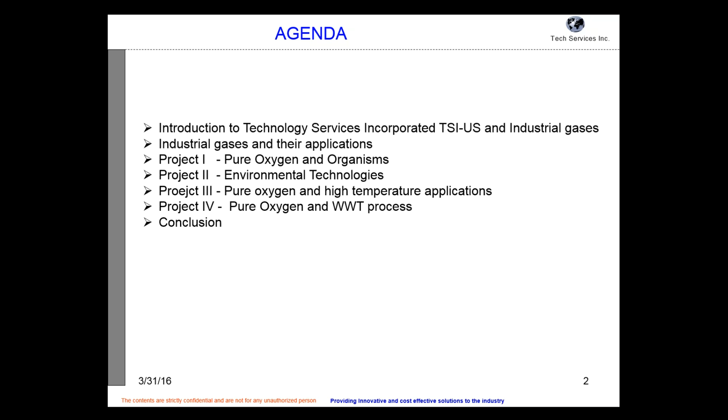My focus today is to look at industrial gases. Industrial gases means oxygen, nitrogen, hydrogen, helium, argon, krypton, CO2, and how they're used in industry. Over many years, I've spent time applying these gases as chemicals to a variety of industries, and I'm going to touch on some of the applications, with my focus more on the environmental area. What I found is these gases impact tremendously on productivity, yield, and economics. I'll quickly go through some of them, and if you have questions, let me know later on. We will talk, and if you have a specific interest in a specific area, we can talk on a one-to-one basis.

I want to cover basically the company I'm running, and also what industrial gases are and how they're manufactured, just to touch on that quickly. I want to focus on oxygen use in the pharma and biotech area, then the environmental industry. Remember, the whole focus is how we can improve the environment. I'll also look at high temperature applications and wastewater treatment.

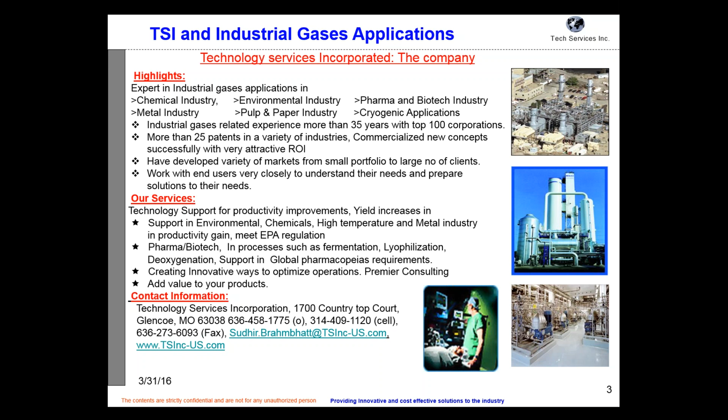I'm going to go through each of them quickly. The company, what I founded and what we have, is the main focus here. Did I do something wrong? Okay.

The company I have has focused on a variety of industries: chemical, metal, environmental, pulp and paper industry, pharma, and cryogenic applications. The main focus has been on how do we make it economically attractive and environmentally safe. Our services include supporting all these industries, helping improve productivity or yield increase. We're basically located in the St. Louis, Missouri area, and that's on the website.

Quickly looking at industrial gases, how they're manufactured in the industry. How do I use the pointer here? The bottom one for pointer? Okay, if you look at the Joule-Thomson principle, which states that if you compress air and expand it, it cools down.

The same principle is used in manufacturing industrial gases. You compress air to the extent that your final temperature is close to minus 400 degrees Fahrenheit. Then the air becomes liquid. Liquid air goes through a distillation column, and based on the boiling point of these gases, you separate out nitrogen, oxygen, argon. This is how industry manufactures industrial gases. Many times, from an economics point of view, they build these air separation units right close to the point of use, where there's a large amount of these gases being used, like nitrogen and oxygen.

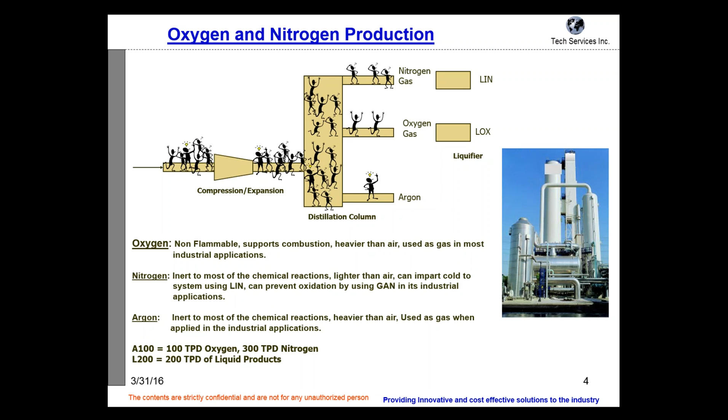Oxygen is a non-flammable gas that supports combustion, heavier than air, and used in a lot of industrial gas applications. Nitrogen is used in a variety of areas, we'll touch on that quickly. Argon is used widely when you have requirements for inerting and blanketing in chemical reactions.

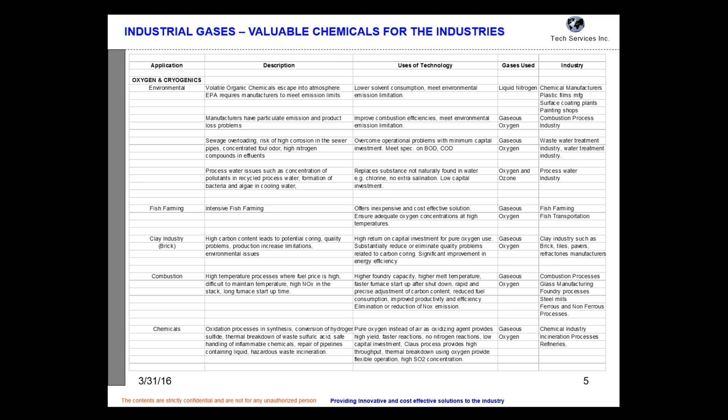They refer to the terms A100 and L200. A100 means an ASU plant producing 100 tons per day of oxygen and 300 tons per day of nitrogen. When they say a plant is L200, a liquefier, that means 200 tons per day of liquid products. That's the industry term used in the market.

It's too much for this particular slide, but I'll quickly mention it. Oxygen and cryogenics, referring to nitrogen areas, are applied in the environmental area, fish farming, clay industry, combustion, and chemicals.

This is a very quick summary I put together. The gases used are nitrogen and various other gases, and these are the industries which use these gases for different purposes.

Let's look particularly at the pharma and biotech industry. There are two focuses: one is to improve the environment, and the second is to improve yield and productivity. Productivity means producing the same product in a shorter time.

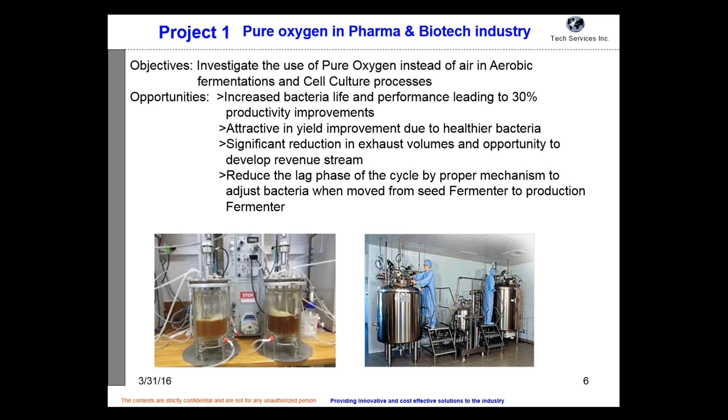Yield means the amount of final product made from the same amount of glucose put in, that's the yield we are referring to. In this area we're looking at increased bacterial life, attractive yield, and significant reduction in exhaust volume. This is the impact on the environment.

If you see most aerobic fermentation processes, you'll see a large amount of exhaust coming out, about 70-80% of which is basically nitrogen, with the remaining being ammonia and other components. By using this process, you're able to significantly cut down the exhaust volume.

We have an example right here in the Midwest region where a company is already doing this and is patented in these areas. Also, if you're familiar with lag phase, growth phase, and stationary phase, this is a typical cycle.

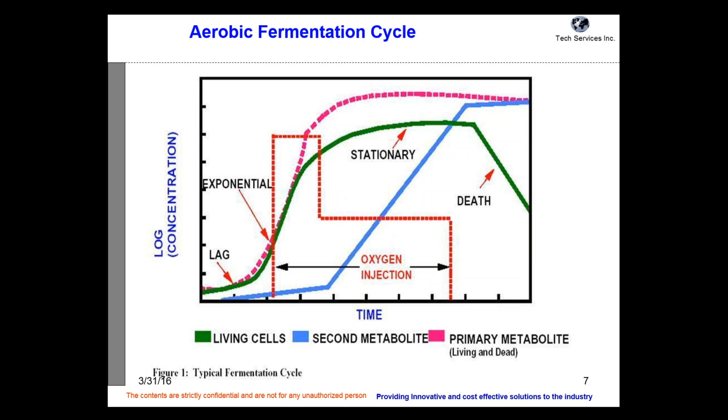When organisms are moved from seed media to actual manufacturing, there's a certain time period where organisms have to settle down with the new environment. That's called the lag phase. They don't produce anything during that phase, they just basically get used to the new environment.

Then there's significant growth in bacteria, followed by the stationary phase and the death phase. There are certain areas where oxygen demand is very high. When we put pure oxygen in this particular area, we saw significant improvement in living organisms' life, productivity, and yield.

This is a simple model simulation we did. If you look at the typical base case, people use air in the aerobic fermentation process. Let's say, for example, you have 100 cubic meters per hour airflow, with typical air at 21% oxygen and 79% nitrogen, and an agitation system in the aerobic fermentation system.

This is the RPM, this is the power usage, and this is the critical part: the percent increase in oxygen transfer from what you put in the gas phase to the liquid phase. This is the quantity. When we increase flow, that's one method people use to increase oxygen dissolution in the media.

You increase to almost 15-16% oxygen dissolution into the liquid phase. When you increase the RPM, that's another way to increase the Reynolds number, NRE, which also allows you to increase oxygen dissolution. It was close to a 72.4% increase in oxygen transfer into the liquid phase.

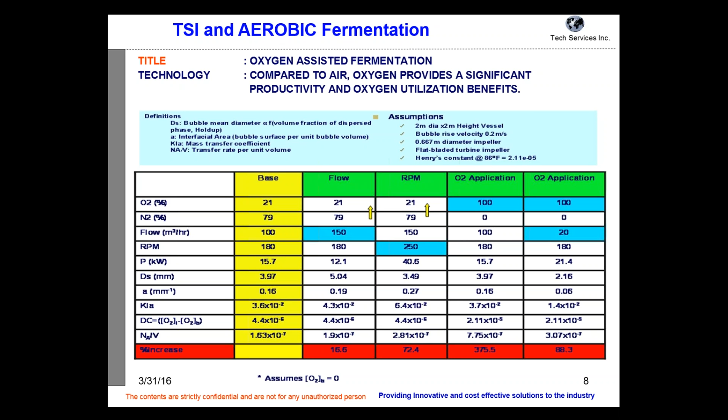We looked at that and realized you don't need that much oxygen, so instead of the previous 100 cubic meters per hour flow, we tried 100% oxygen at only 20 cubic meters per hour. Still an 88% increase in productivity. What that states is when you use pure oxygen, if you look at the partial pressure of oxygen in the liquid phase without nitrogen, a lot more oxygen is dissolved in the liquid phase.

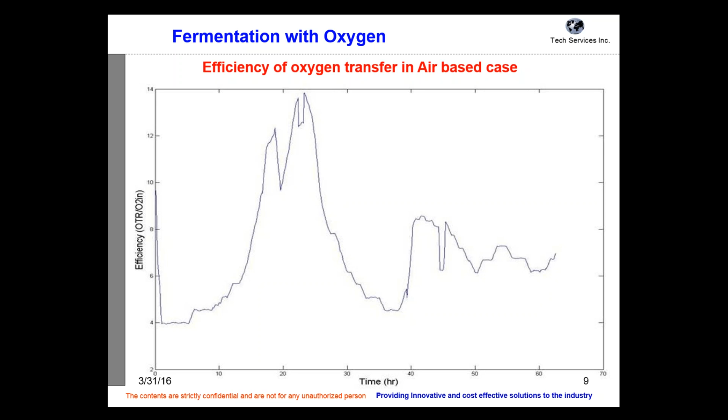The rule of thumb is 5 times more oxygen is dissolved in the liquid phase when you use pure oxygen. Normally at ambient pressure and temperature conditions, you're dissolving about 7 to 8 ppm of oxygen. With pure oxygen, you can get 40 to 50 ppm. It's an excellent approach in a variety of liquid phase operations, whether it's chemical reactions, wastewater treatment, or pharma and biotech industry.

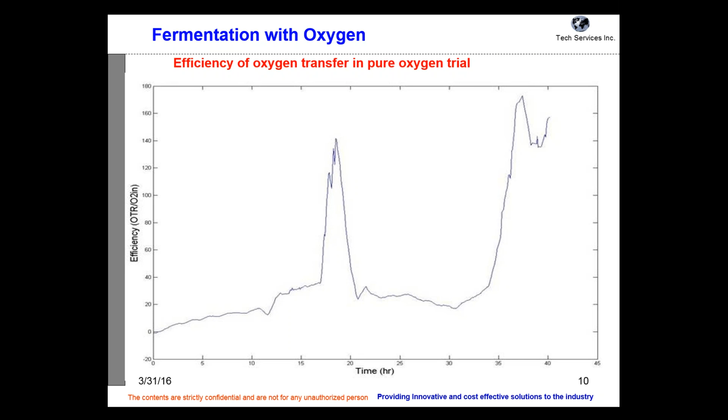This is an actual test, by the way, done with a company in the Midwest region, a very huge company. If you look at the oxygen transfer rate efficiency with air, you can see the trend. Maximum was about 13 to 14% and went down. So if you look at the average, somewhere around 7 to 8% transfer.

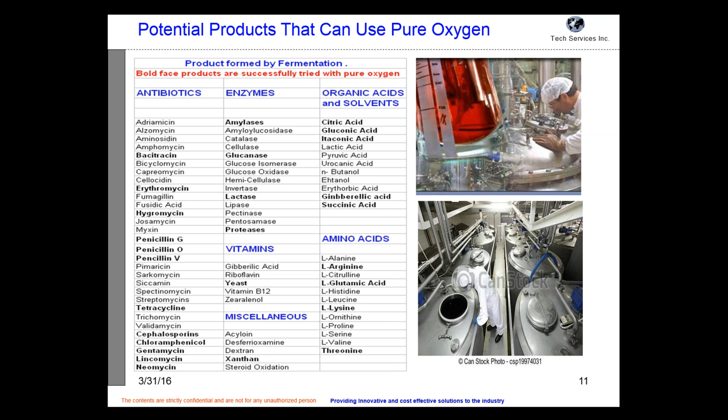When I look at pure oxygen, very interesting chart here, up to 180% efficiency you're looking at. You can see how much oxygen went into the liquid phase in the pure oxygen trial, on average somewhere around 40 to 60%. This shows the amount of oxygen dissolved in the liquid phase with the media or wherever you're using it. It really significantly goes into the liquid phase.

What are the applications? You're looking at a variety of fermentation processes - antibiotics, enzymes, vitamins - these bold letter items are where oxygen finds its home to increase productivity and yield. Many times people see that demand has increased, and instead of putting money into building a separate fermenter, they can use the existing fermenter and increase its capacity. And it's possible to do that.

Overall, you're looking at increase in production yield. These are actual numbers in the plant - you could do better than this. 30% plus productivity, 10% yield. There was one company I was dealing with - when I mentioned that number, they said even if you give me 0.5% increase in yield, they'll be shocked to death. And we can do that up to 10%. So this is possible with pure oxygen application.

Better control on oxygen dissolution. There was a case where one company basically said that's not possible, it cannot be done. So we said, okay, let's do a pilot plant. And when we did the pilot plant, the moment he saw that, he was shocked. So what it comes down to is unless you try it, you don't know what happens.

And basically it follows the principles: higher dissolved oxygen level, more efficient use of pure oxygen, less foam. That's another part also - many times in operations you have a lot of foam being formed because you're putting so much air to increase the oxygen concentration in the liquid phase, and it ends up being a lot of foam on the top. Many companies use anti-foam agents, which are expensive. This allows you to basically eliminate the foam, and we have done that.

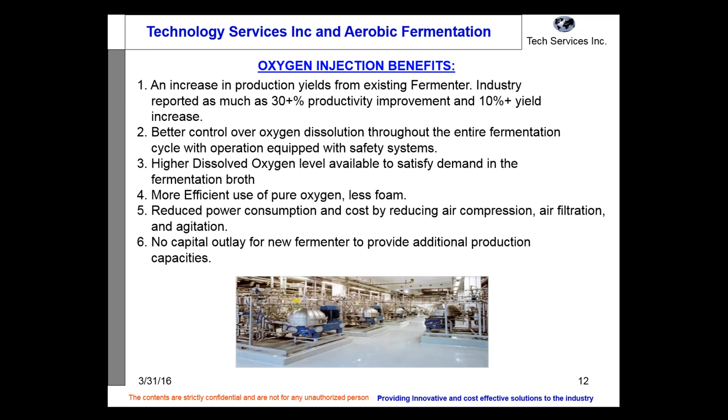As I said, in the Midwest - I talk more about Midwest because we are in the Midwest region - there are companies who are basically eliminating foam, saving quite a few $100,000, by the way. When you look at no capital outlay for a new fermenter and reduced power consumption, with this you don't need that much agitation also, strictly because the concentration gradient allows you to quickly go into the liquid phase. We were able to reduce the power consumption, particularly impellers, close to more than 30%.

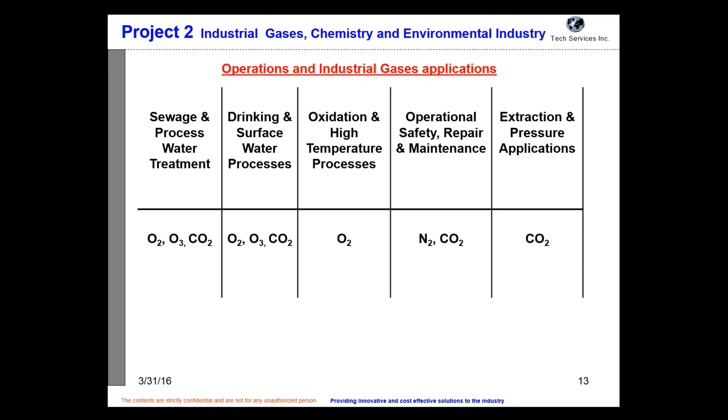I want to quickly jump into different areas where these gases have found use. Sewage and process water treatment - oxygen, ozone, carbon dioxide are widely used. Drinking water surface processes - again these have found a home there. Oxidation, high temperature processes - oxygen has found its home to improve productivity and yield, and in environmental areas, also operational safety, repair area, and extraction pressure applications. These are wide applications, including pharma and biotech area.

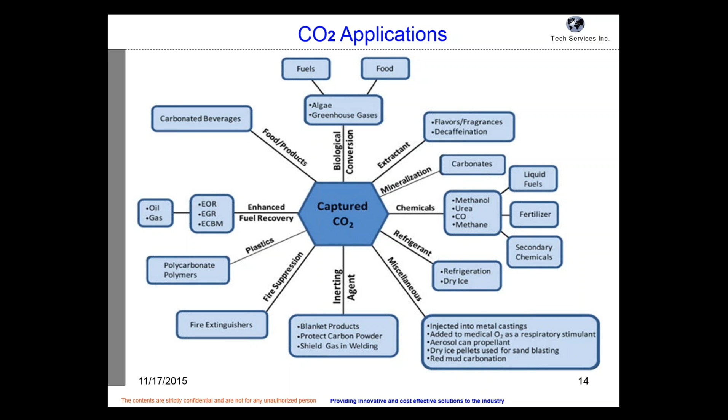Food industry - this is widely used, by the way. And also biological conversion - algae, fuels, and food. These are all different areas where CO2 is widely used, and again depending on its application, it controls the economics also.

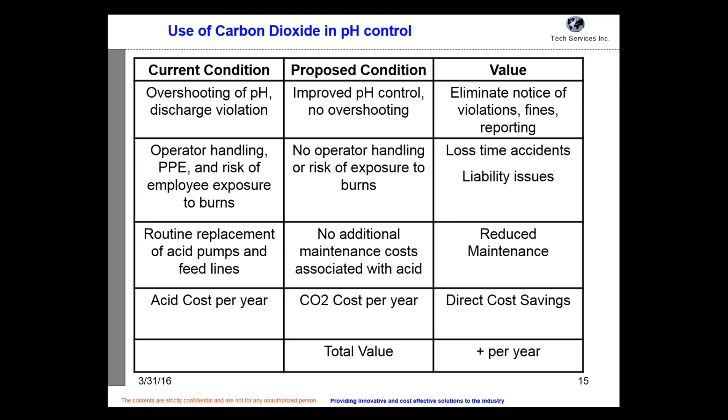CO2 is also used in pH control in wastewater treatment and other areas. Typically, people use hydrochloric acid or sulfuric acid to control pH value. But CO2 is a mild chemical, and you don't need that much maintenance cost associated with it because it's not dangerous compared to sulfuric acid and hydrochloric acid, which require proper handling. Also, no overshooting, which allows you to control pH much better. This gives overall economic benefits - this was done for one client, but I didn't want to put the numbers since that was more reflective of their operation, but the economics here are much better.

We look at the sewage and process water treatment area. Oxygen has found its home in BOD, biological oxygen demand control. We have found that it significantly increases the effectiveness of the organisms and allows you to perform what you need to do in the wastewater treatment processes.

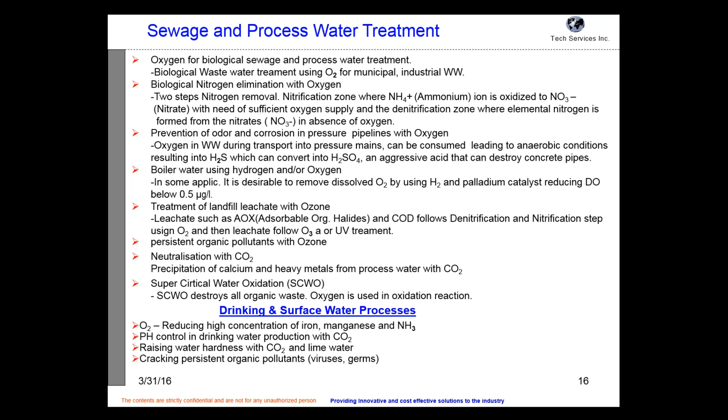If you look at neutralization with CO2, we just covered that - also supercritical CO2 is widely used in the industry. In tobacco, to remove nicotine, many years back we had done that - using supercritical CO2 you can remove nicotine and dangerous chemicals from tobacco. It's now used in the pharma and biotech industry also, primarily as an environmentally safe alternative to sterilize drugs. The CO2 that comes out is environmentally friendly compared to other alternatives.

In the drinking water and surface water area, you're looking at oxygen, pH control, raising hardness, and also cracking certain organics, basically viruses and germs - you can break these down with ozone and UV.

Some other applications: oxygen in high temperature applications. When you make sulfuric acid, you're making sulfur dioxide and sulfur trioxide. If you use pure oxygen, which is done in the industry also, it allows you to be much more efficient and produce a lot more product. Sludge incineration - I'll show you some slides soon.

Also from the safety point of view, they use nitrogen and CO2 for inerting closed and open systems. In the petrochemical industry, nitrogen is widely used for pigging and pipe inspection - while operation is going on, they want to clean the pipe and continue operation, so they use nitrogen to blanket it, inert it, and then work on it.

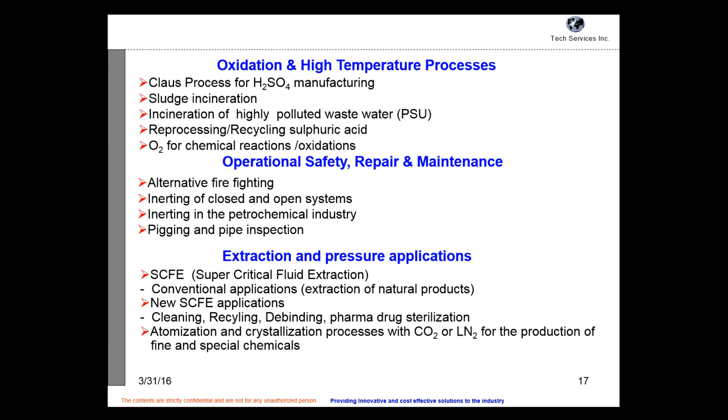As I mentioned about supercritical applications, conventional application for extraction of natural products, you might be familiar with that as to laundry industry. They replaced their freon-based chemicals to supercritical CO2. They use supercritical CO2 in their dry cleaning and laundry-based operations.

Atomization and crystallizing process with CO2 and liquid nitrogen is also well known in the industry, particularly in the metal industry, they use that widely. This will be interesting to know: many times in an exhaust system you have undesirable chemicals going through that, and EPA won't allow you to do that. So what you see here is those organic chemicals, based on their boiling points, you're able to liquefy them.

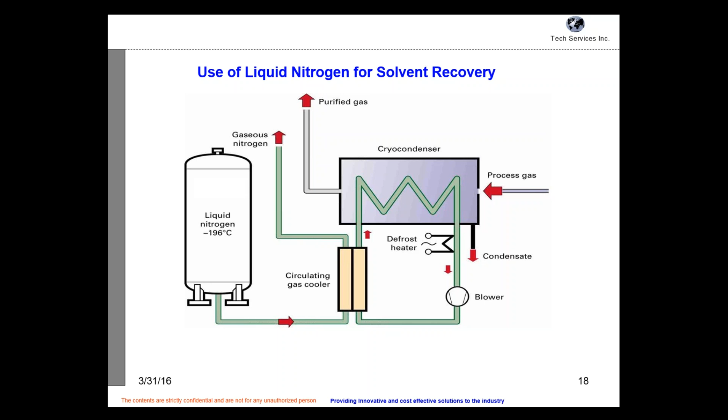So exhaust goes through the cryocondenser. You have liquid nitrogen going through a heat exchanger. You have an intermediate fluid going through that takes the coolness from here and maintains the desired temperature in the exchanger, such that that gas, which is not acceptable by EPA, is liquefied and condenses out. And now we have environmentally friendly exhaust coming out.

This is the solvent recovery system. It's used widely in the industry also. They supply liquid nitrogen, and you have a heat exchanger here. An intermediate fluid will allow you to cool down the exhaust and remove the condensate.

To summarize the opportunity in this particular area, you're looking at an economical way to increase environmental loading handling, and also improve safety, reduce organic emission, reduce maintenance and operating cost. Remember, when you use these gases, you don't need any kind of compressor or pressurizer.

Because typically when nitrogen, liquid oxygen, and argon are stored, they're stored in the liquid phase. So when you go through liquid to gas phase, you're looking at close to 600 to 700 times expansion in the same volume. So you have a pressure close to 150, 200, 300 pounds pressure, whatever you want. So you can control the pressure depending on your needs, put a pressure regulator and take care of it. So you don't have any moving part here.

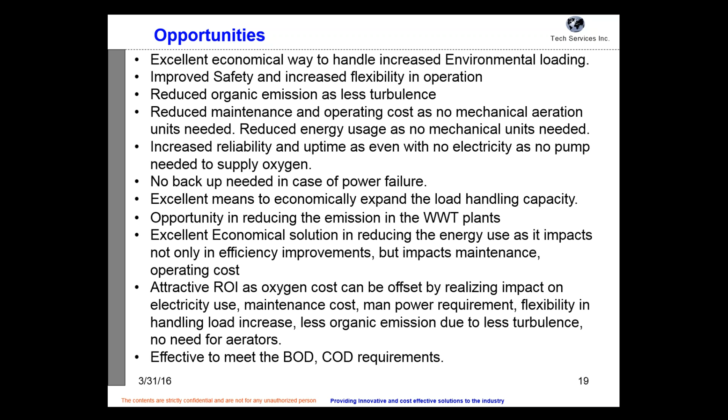That's the beauty of this whole thing. No backup needed, because you're not depending on any electricity here, because nitrogen and oxygen have the desired pressure you need. So in case you have a power failure, the system is still operational. That's an opportunity for economically expanding the load handling capacity.

You're also looking at economics in reducing energy. It not only improves the efficiency, but also impacts the maintenance and operating cost. For a case like this, as I mentioned, 15, 20 years, this stays as it is - there are no changes to the EPDM plastic material, by the way. And it's very effective to meet BOD and COD requirements - biological oxygen demand, chemical oxygen demand.

Now quickly look at the high temperature application area. Again, this is a retrofit - you don't need to change your furnace or anything like this. You can control the temperature based on how you apply the system. This oxygen is controlled through a control panel, which a typical industrial gas company will supply to you.

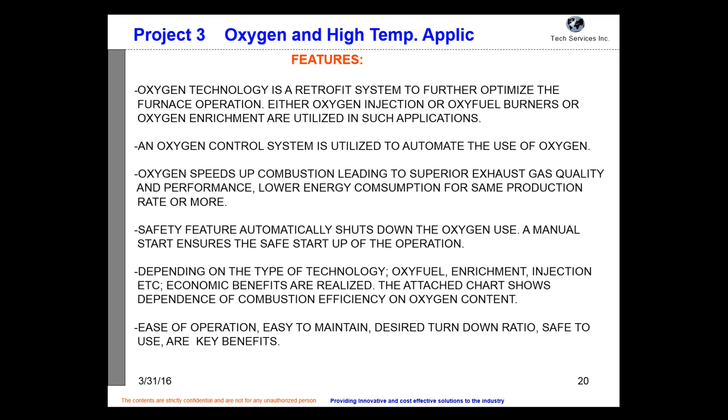Oxygen also speeds up combustion - I'll show you why in a minute. There are also safety features in the control panel so that when the demand is reduced, it automatically shuts down for any unforeseen conditions. Depending on the technology, there are various ways to use oxygen called oxy-fuel burner, enrichment, injection - all these different technologies find a home in these high temperature applications. It's very easy to operate - once you set it up, you can operate it very reliably.

One of the reasons why they use oxygen: this is a case where you have 21% oxygen in air. When you use an air-based combustion system, you have, let's say, 100% of your flue gas coming out. As you increase your oxygen concentration in the air - this is 25% - the way you do it is you back off the air and put pure oxygen in there, such that you have 25% oxygen concentration when you're using combustion. You can see you've reduced your nitrogen, and that leads into a lower exhaust volume.

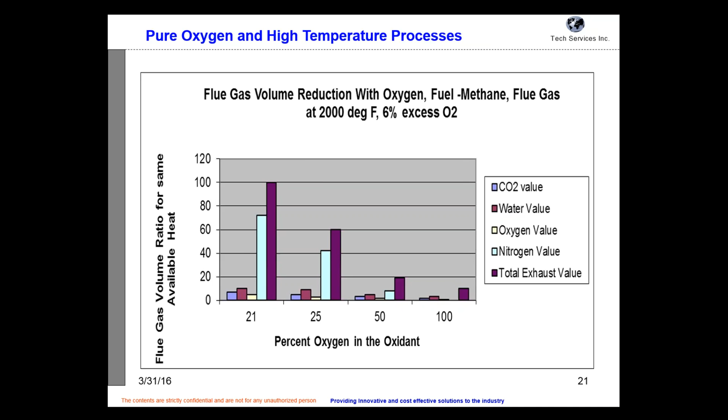At 50%, 100% - when you totally eliminate your air and put only pure oxygen, look at what has happened: you don't have any nitrogen. So you have the CO2 coming out here, and you can see the total volume is significantly lower, and basically you don't have any NOx emission either. This is the reason why people use pure oxygen in combustion processes - it allows you to environmentally control your total volume. Imagine if you already have a cleaning system for the environment, how efficient it will be working.

This also allows you to capture CO2, because it's much purer CO2, which can be utilized for other purposes if needed. This is another reason why this oxygen process works.

If you look here, this is the percentage of oxygen you put in the airline. When you put 100%, that means there's no air, just pure oxygen added to the airline. This is the flame temperature, measured in the middle of the flame. With natural gas and air, the flame temperature is 3,400 degrees Fahrenheit. As you increase the oxygen concentration in the air phase, the flame temperature keeps going up. When you have pure oxygen, you get 5,000 degrees Fahrenheit.

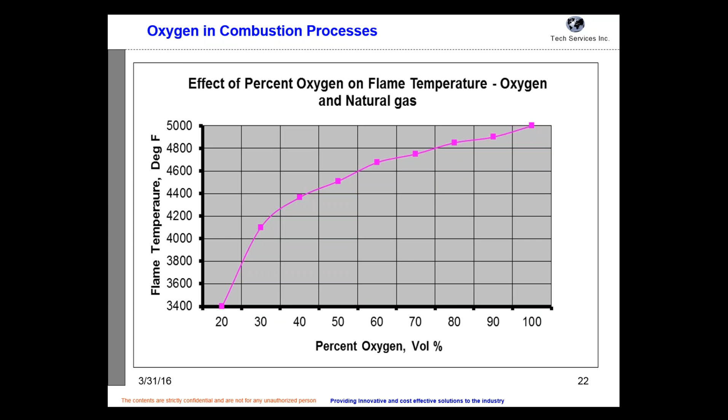What does that mean? When the flame temperature goes up, your heat transfer moves from convection to radiation — T to the fourth power, if you remember the equation. So you're transferring heat much faster and easier when you have 5,000 degrees Fahrenheit.

You have to control and look at your furnace, how you're using it, and make sure it's safe to use. But we have done this in so many applications — it's very successful.

If you look at a typical furnace, maybe in the cement industry, lime kiln for pulp and paper, or coke manufacturing, you'll see a big furnace with refractory lining and a main burner, typically natural gas and air, or coal and air. If you look at the temperature in the middle of that flame, for natural gas it's around 3,400 degrees Fahrenheit.

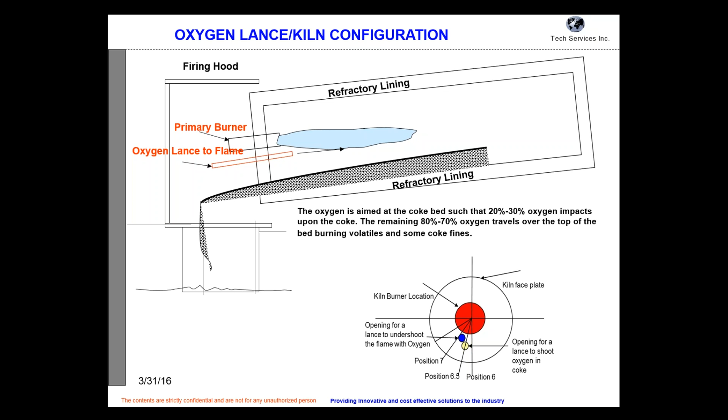What we did is use oxygen lances. Right underneath the bottom of the flame, we basically made an oxy-fuel flame with much higher temperature. This converted the heat transfer into radiation heat transfer, and here's the product. That's how they do it in the cement industry, lime kiln, and other industries, including coke — it allows you to very effectively produce the product you're looking for without impacting the refractory lining.

Since you have a cover on top, but the flame temperature here is only 3,400 degrees while this part is 5,000 degrees, the refractory didn't see any high temperature. And again, you have the product here — it captured most of the heat that was needed.

If you look at the side view here, you'll see the opening for the lance and the different positions where you can put the lance. This is called the undershot method, and it's used in the industry as well.

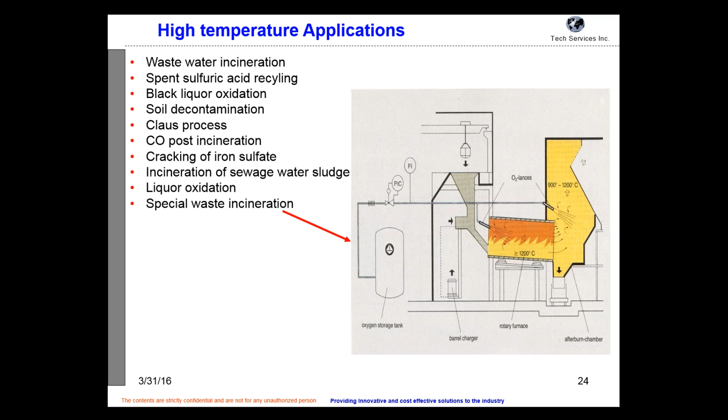I had the pleasure of working with the DEQ in Louisiana. I was working with a very big chemical company that had an issue with emissions. I put in a system like this, and they were all shocked. They invited me to their office, and we made a presentation to many inspectors showing how a system like this could work, and that it's very economical — rather than shutting down the facility, you can operate this kind of system.

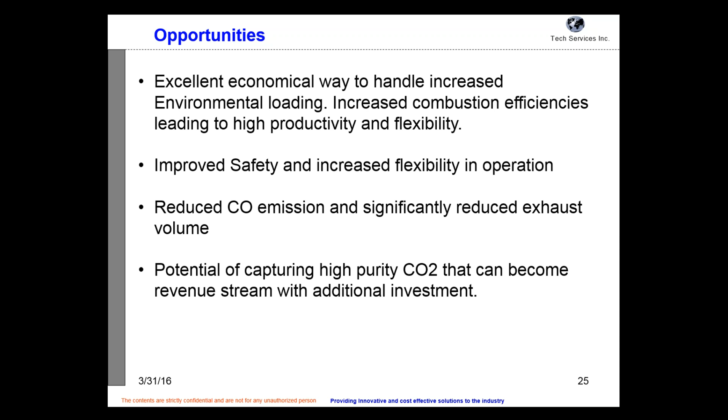You can look at this — applications include wastewater incineration, spent sulfuric acid, black liquor oxidation for the pulp and paper industry, soil decontamination, the Claus process for sulfuric acid, CO post incineration as shown here, incineration of sewage waste, liquid waste sludge, liquor oxidation, and special waste incineration. These are all different industries using high-temperature applications with oxygen.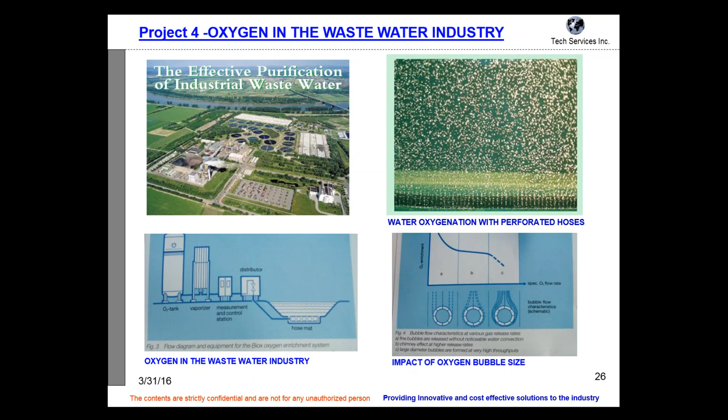Now let's look quickly at the wastewater treatment area. You can see in this picture how it produces bubbles, and bubble size does affect dissolution — the smaller the bubble size, the more surface area, the easier it is to dissolve. This is a typical plant where this has been used widely, and as I said, for 10, 15 years you don't have to do anything to it.

Why does it work? If you look at water and air under ideal conditions, you'll have 8 ppm of oxygen dissolved in the liquid phase. When you use pure oxygen, it goes up to close to 40 ppm under the same ambient conditions. Now, if you increase the pressure, you can go further — at 100 pounds of pressure, you'll have dissolved oxygen of 100 plus.

So again, it depends on your needs and requirements, how much oxygen is in the liquid phase, and how you can control it. Liquid phase reaction depends on the DO in water, and that's the whole idea. If you look at liquid phase reactions, only the things dissolved in the liquid phase work. Other gases will just come out.

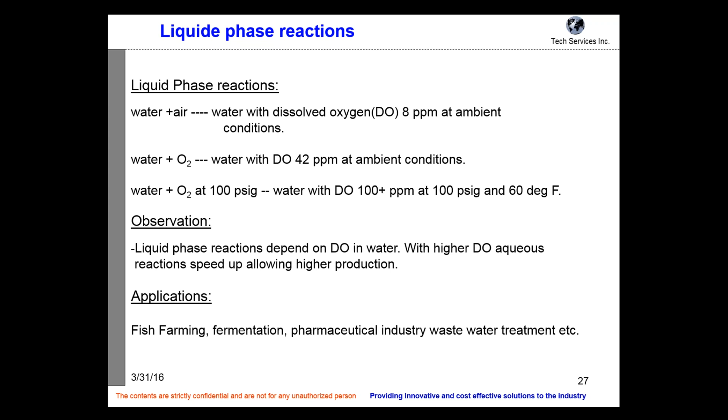So if you have too much air going in, and if you don't have high RPM and a lot of mixing ability, a lot of air is going to come out. When you use pure oxygen, if you put too much in, you're going to lose oxygen coming out the exhaust. You have to control the amount of oxygen going in, and you can cut down your basic turbulence or Reynolds number, which impacts your performance.

Remember, oxygen does cost money, but by controlling oxygen usage to your needs, you can easily control the oxygen cost.

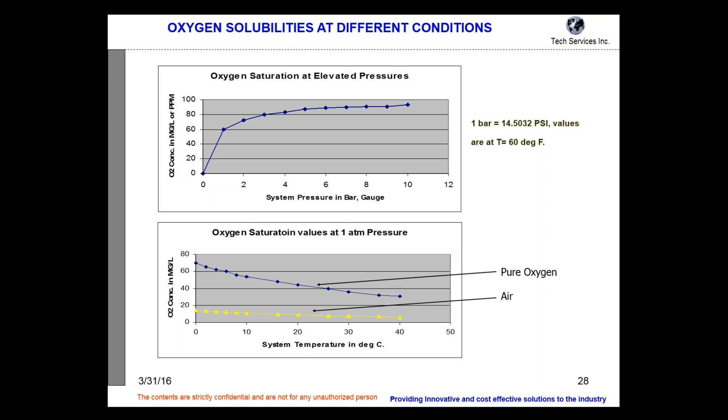Applications you find this in include fish farming, fermentation, the pharma industry, wastewater treatment area - all these areas where these gases, oxygen, is used. For example, I'll quickly go through this.

Under 1 atmosphere pressure, this is a trend. Depending on the temperature, higher temperature means less dissolved oxygen, and lower temperature means more dissolved oxygen. You can see that's pure oxygen, and this is air.

When you look at high pressure, depending on the pressure you have - 80, 90, 100 - you can see that your oxygen concentration in the liquid phase goes up high.

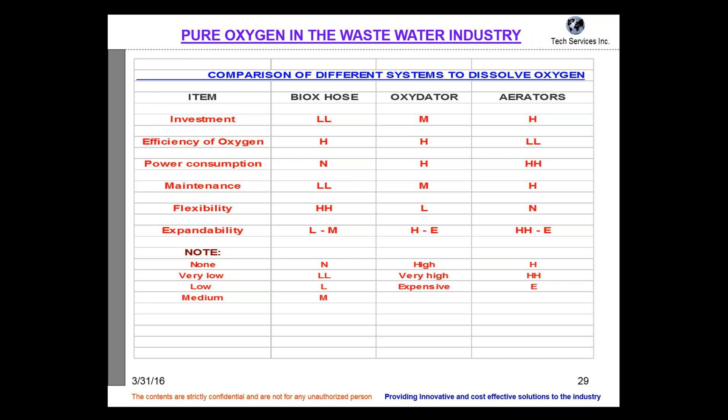If I summarize and compare, particularly in the wastewater treatment area with various applications, this is one method to supply oxygen in the liquid phase, this is another method, and this is another. These are relative numbers together - medium, high, very low - so you can look at that.

Benefits, again in summary for the wastewater treatment area: low investment, high oxygen efficiency, no energy consumption, easy to operate, maintenance free, immediately ready. When I say no energy consumption, I'm referring to the amount of oxygen going into the aeration related to the efficiency you're looking at. High availability, noiseless, extendable, high flexibility, no odor problem.

Remember, when you use too much air in the wastewater treatment area, you get a lot of organics coming out from the wastewater, which creates environmental issues. I had a case right here in the Midwest where every time they put a lot of air in with an organic load going in, the neighbors would complain about the smell and odor. Ever since we put the system in there, there were no complaints at all, because it allowed us to create an oxidative environment, so there was no hydrogen sulfide, which causes the odor by the way - that was totally eliminated.